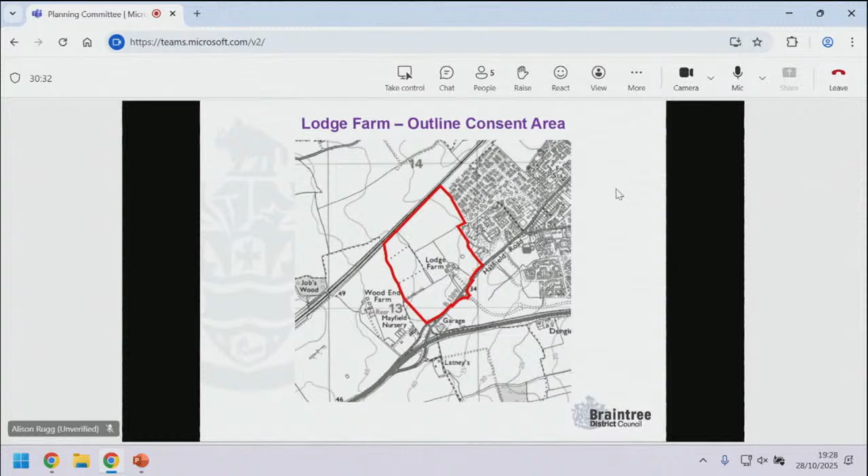To date, 524 dwellings have been consented by way of 5 separate reserved matters applications. 454 dwellings have been occupied, 305 of which are private and 149 affordable. This application for Phase 5, shown hatched on the screen, forms one of the final reserved matters phases for dwellings on the site.

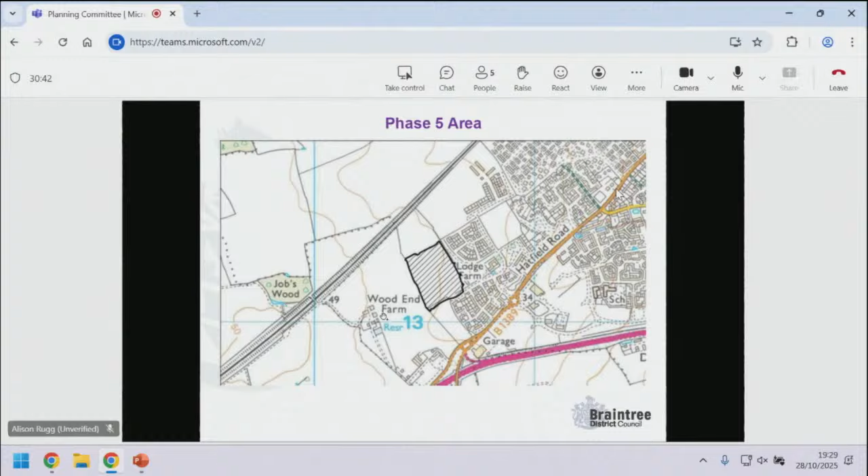Phase 5, outlined in yellow here, is approximately 4.76 hectares and is located along the western edge of Lodge Farm, with Phase 4 to the north and the enterprise land to the south and Phase 1B to the south. On the eastern edge of the site are mature trees and hedgerows, with the Central Park play area approved as part of Phase 2 beyond. The western edge of the site also features mature trees and hedgerows.

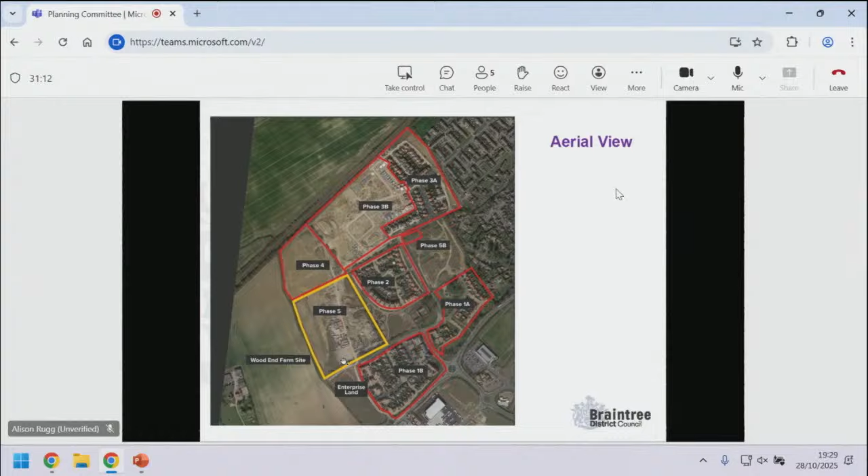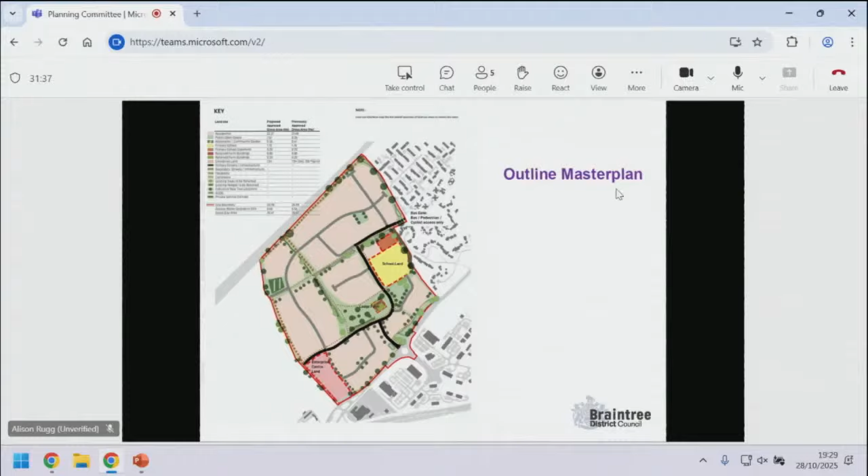The design guide ethos of the site is underpinned by the overall vision of the outline application master plan to provide an attractive gateway into the town with a mix of commercial, residential and open spaces along the northern side of Hatfield Road. The principle of development has been established by way of the outline planning permission, and therefore only layout, appearance, scale and landscaping are for consideration under this reserved matters application.

During the lifetime of the application, the proposal has been modified following significant engagement between officers and applicant to overcome concerns regarding layout and design.

In terms of layout, the site is broadly rectangular in shape, with a central tree-lined street running north to south, which links to the remainder of the Lodge Farm development and acts as the 2 main vehicular access points into the phase. To the eastern and western sides of the central tree-lined street are development parcels either side, and the approved outline parameter plan dictates the road structure through the site, along with footpaths which run down both sides and the height of buildings.

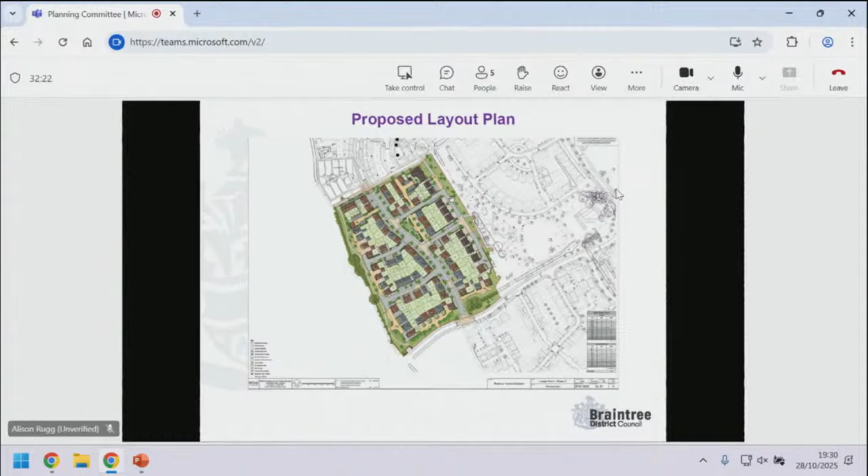In terms of scale, the application proposes residential dwellings as a series of 2, 2.5 and 3-storey detached, semi-detached and terraced dwellings, with the inclusion of a block of flats to the north-eastern corner, and 1-storey bungalows here. The taller 2.5 and 3-storey buildings are located along the eastern edge, fronting the adjacent park. The remainder of the site is mainly 2 storeys in height, shown in yellow, with a scattering of 2.5-storey marker dwellings, shown in red. The height of the proposed dwellings is in accordance with the approved building heights parameter plan approved at the outline stage.

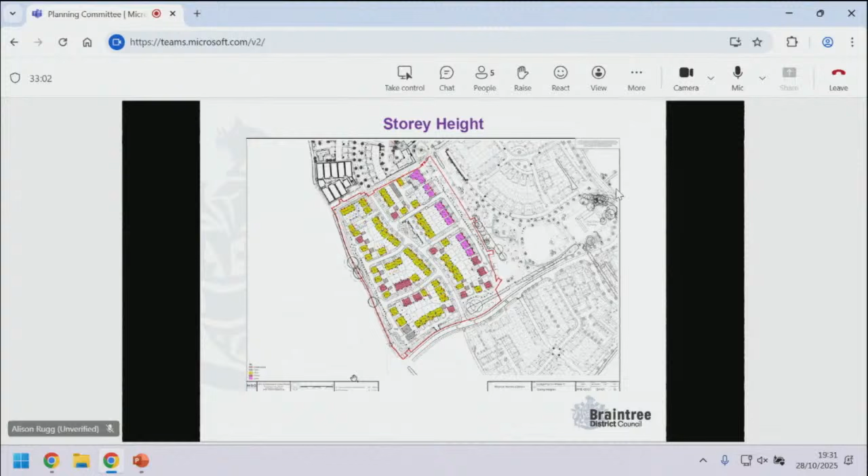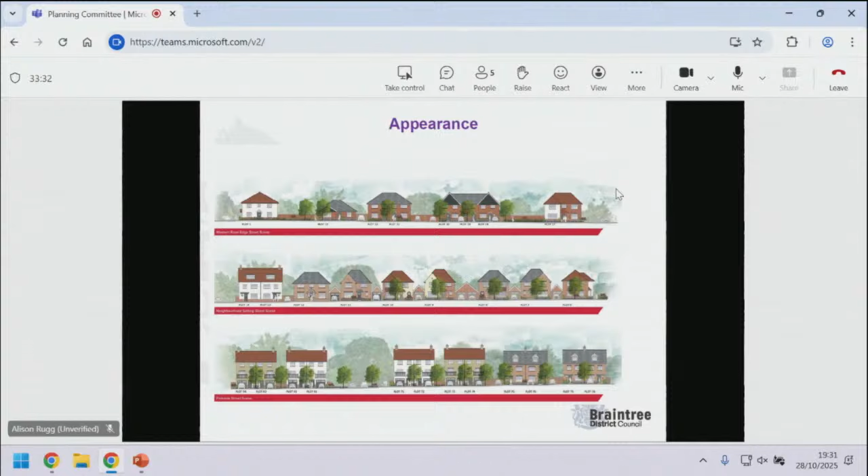The appearance of the dwellings is in general accordance with the approved site-wide design guide approved at the outline stage as well. The mix of materials would include red buff brick, light-coloured render, light and dark coloured weatherboarding, red, brown and slate grey colour roof tiles in line with the previously consented palette of materials. Chimneys also feature throughout the site on prominent buildings. The design of the dwellings does not seek to create stark variations, but subtle changes that make the development feel cohesive to the rest of the approved Lodge Farm sites.

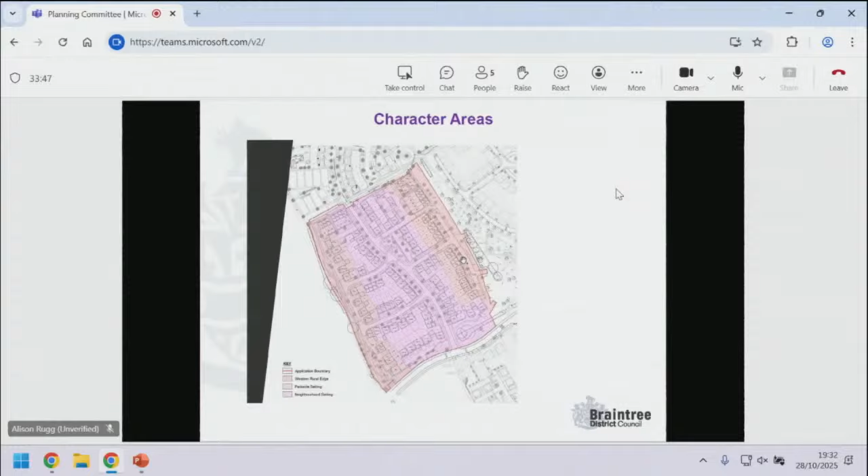3 character areas have been proposed for the site: the western rural edge to the west, the neighbourhood setting in the middle, and the parkside setting to the east. The western rural edge, which currently overlooks the open countryside onto the Wood End Farm land, consists of medium density housing, providing an appropriate transition to a soft development edge utilising existing field hedgerows and field boundaries. This area consists of 2-storey detached and semi-detached typologies, with limited instances of 2.5-storey buildings and 1-storey bungalows.

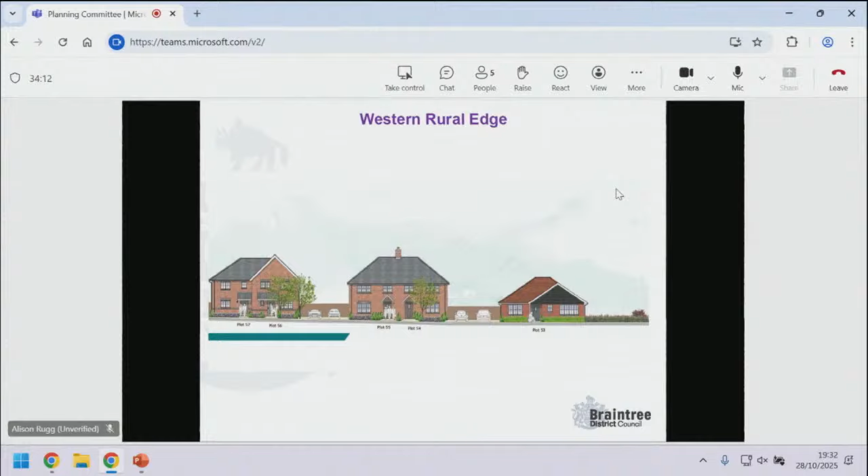The neighbourhood setting character area is located within the centre of the site and features the highest density. Building typologies consist of detached and semi-detached 2 and 2.5-storey dwellings, as well as terraced and mews housing typologies.

The built form in this area will have a strong urban frontage and a consistent building line close to the back edge of the footway. Visitor parking will be located in streets in defined parking courts, and traffic calming measures such as raised tables and crossroads features defined by street trees will act as keynotes throughout this character area.

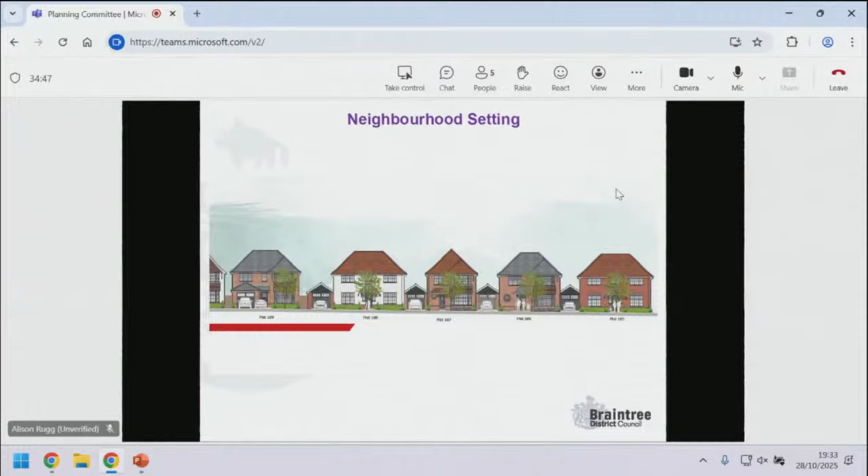The Parkside character area runs along the eastern edge overlooking Phase 2. The built form varies in terms of dwelling size and features 2.5 and 3-storey townhouse typologies. A 3-storey apartment block, which can be seen on the screen here, is located in the northwest corner of the site to match the design ethos of the adjacent Phase 4 apartment block.

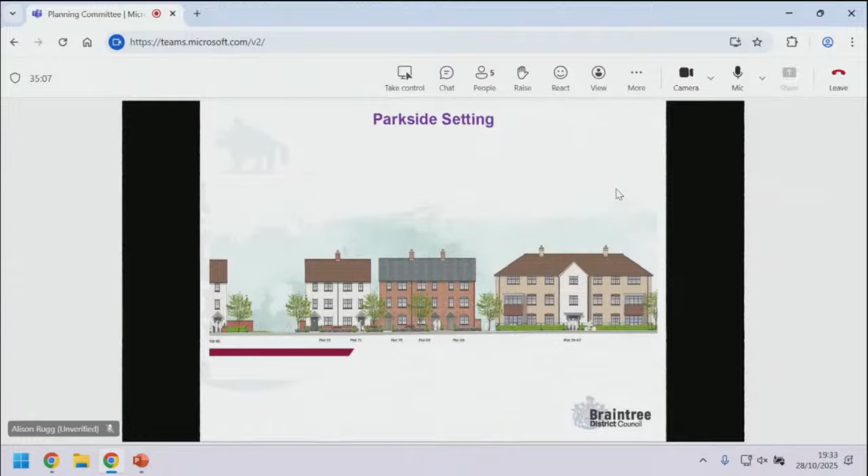In terms of residential quality, all the dwellings have an adequate level of internal and external space. All units are dual aspect and provide good levels of natural light and outlook. All the dwellings are in accordance with the Essex Design Guide and NDSS in terms of internal and external amenity space and separation distances.

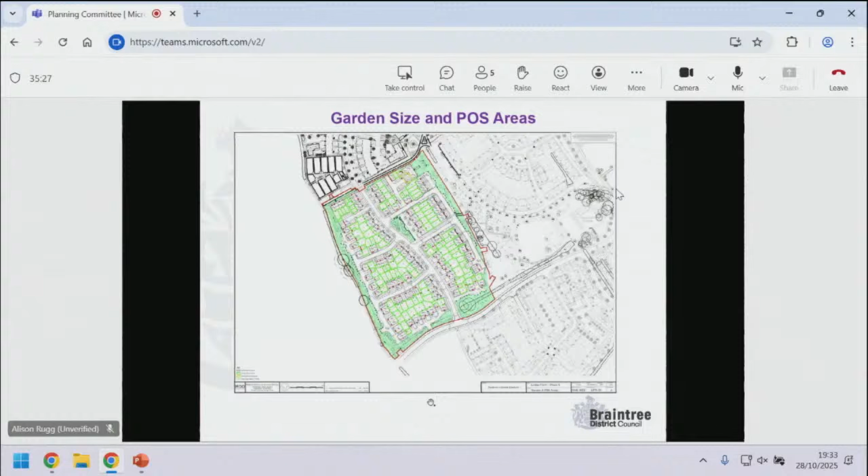In terms of affordable housing, the Section 106 agreement attached to the outline permission requires 30% provision. The application proposes a total of 33 affordable dwellings, 24 of which will be for affordable rent, shown red on the plan, and 9 shared ownership dwellings, shown grey on the plan. The proposal also includes 2 wheelchair accessible units, accessible housing bungalows which comply with Building Regulations Part M4 Category 3A. The Council's housing officer is supportive of the affordable mix and location.

In terms of market housing, the proposal does not accord with the Council's SHMA in that there is an obvious under-provision of 2-bed dwellings and over-provision of 4+ bed dwellings. The original outline was considered prior to the adoption of the new local plan, so there is no planning condition on the outline permission that requires the mix of market dwellings to match the mix specified in the SHMA. The SHMA does state that market housing mix can deviate from the expected percentage mix should the site be more suitable to an alternative mix.

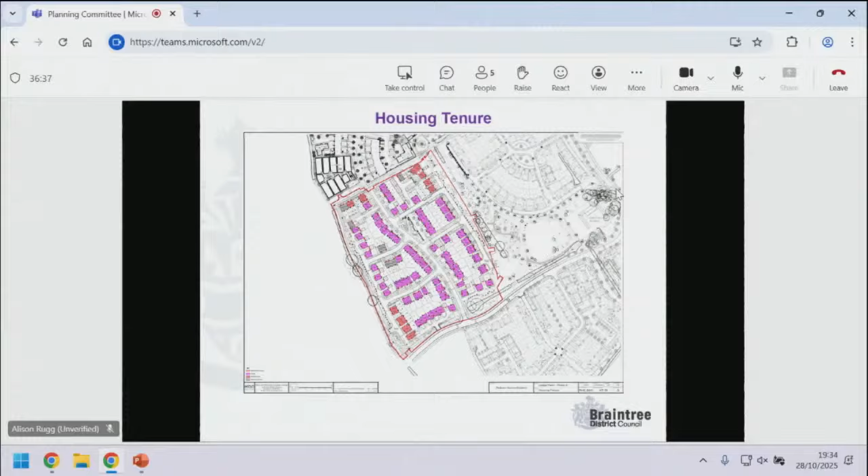The pattern of development and size of houses within the previous phases of Lodge Farm edges towards a mix of larger dwellings, all of which have been sold and are currently occupied. This is not considered in its own right to form a reason for refusal.

In terms of open space, the phase delivers a total of 0.92 hectares of open space and complies with the outline Section 106, which requires 7.31 hectares to be delivered throughout the site.

The open space is segregated into 3 character areas: the parkland edge to the east, the open space, and the informal edge to the park. The existing hedge and tree planting will be enhanced, and footpaths and shared cycleway will create direct links into the adjacent park with access points here.

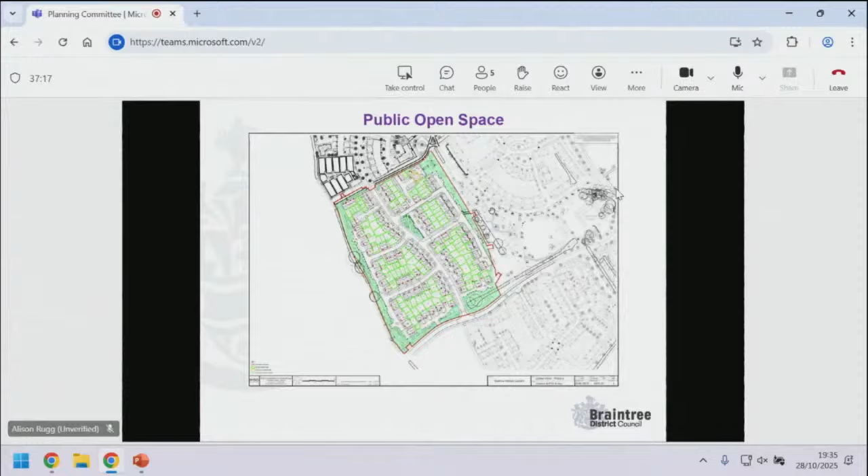The western edge open space creates a strong landscape buffer which helps to soften the visual impact of the development and views into the site from the west.

The open space features a perimeter leisure route with connections north and south. The path features a sculpture trail providing opportunities for play and seating.

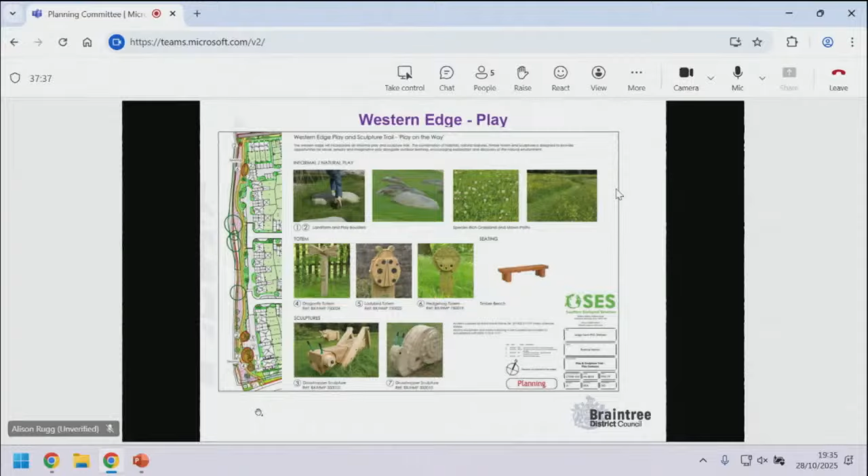The central green measures approximately 570 square metres and is located in the heart of Phase 5, designated as a formal landscape space enclosed by feature railings and a hornbeam hedge. The area would incorporate seating and natural features, providing opportunities for informal doorstep play.

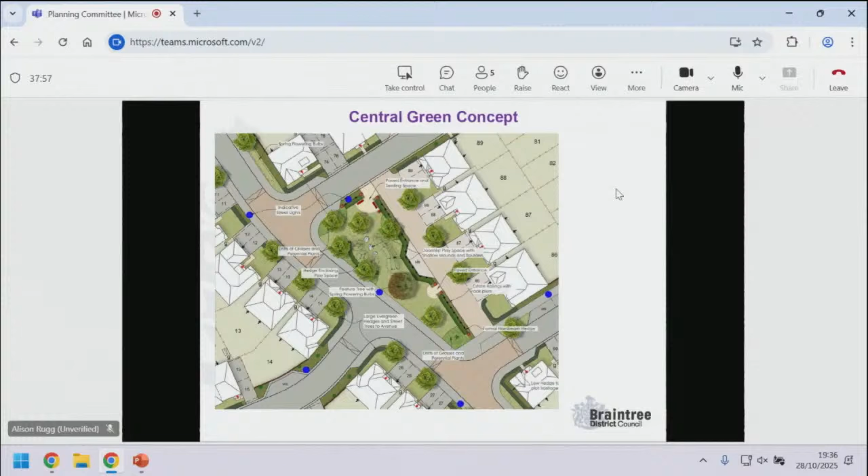In terms of new landscaping, new planting will build on the character of the existing vegetation to create a landscape-dominated setting to the development, reinforcing the parkland character and providing opportunities for biodiversity. A hierarchy of tree planting is proposed with native, evergreen, deciduous specimen trees.

New strategic tree planting is incorporated along the streets, throughout areas of public open space and along the green corridors, totalling 106 new trees. All of the street trees will be located within management company land.

Given the quantity of trees that have perished at Lodge Farm in recent years, the Council's Landscape Officer has recommended further details of tree planting come forward to ensure that every effort is made to prevent trees from dying.

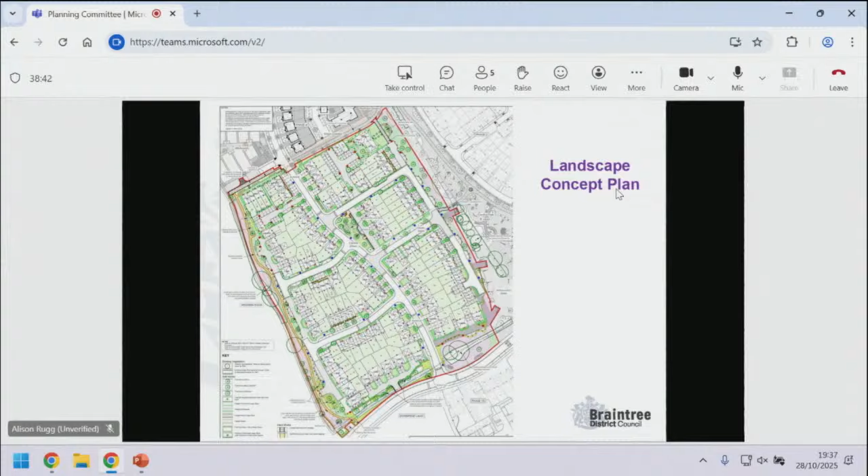The application proposes the removal of a Category U hedgerow, located to the south of the site here. This is to facilitate the creation of one dwelling, open space, the drainage infrastructure, footpath and access into the private drive. The hedgerow measures approximately 60 metres in length and consists of elder, smooth-leafed elm and common hawthorn.

The report that accompanied the application states that the structural condition is poor and features Dutch elm disease and dead trees. Whilst the removal of any existing vegetation is disappointing, the loss of this low-quality hedgerow is considered to be minor and can be mitigated with new native planting as part of the Landscape Master Plan, which in turn will increase biodiversity on the site, including the addition of 106 trees.

Whilst ecology was considered at the outline stage, an updated ecological appraisal accompanied the application, which was assessed by the Council's ecologist. No objections were raised, however lighting details will come forward by way of condition to ensure that all lighting is bat sensitive on the site.

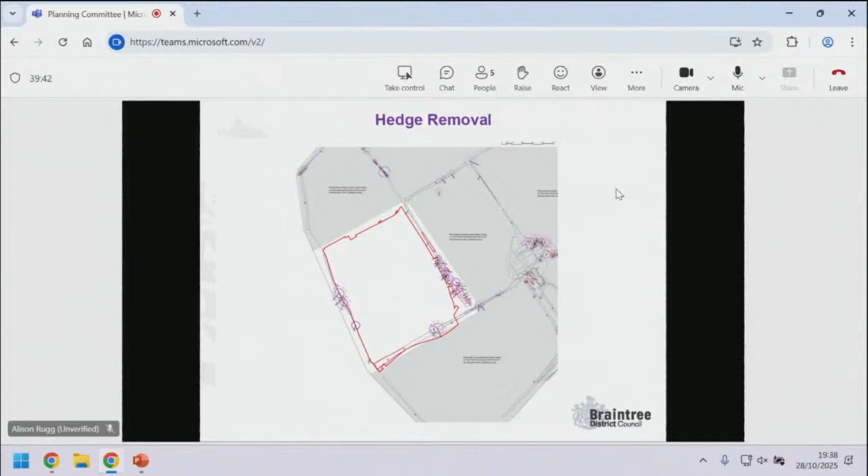Parking provision has been made in accordance with Essex parking standards. A total of 215 allocated parking spaces have been provided, shown in pink, and 29 visitor spaces, evenly distributed throughout the site. Bin storage areas are located within rear gardens, and bin collection points are located where necessary to ensure appropriate building control bin drag distances.

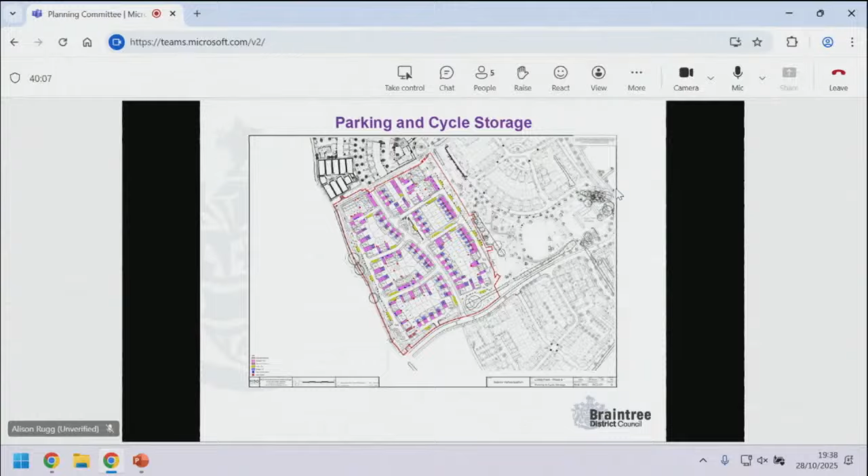In terms of highway adoption, a late concern was raised by Essex Highways in that they would not adopt the loop road to the north of the site. This was necessary as refuse collection vehicles are required to drive on the road for waste collection. This resulted in further discussion with Waste Services and Highways, and a solution was found in that BDC Waste Services will now drive on the unadopted road, subject to a legal agreement being entered into.

From this, a suite of updated plans was submitted and the principle of a legal agreement agreed between the Council and the applicant to ensure no liability on BDC should there be any damage to private roads from refuse vehicles using them.

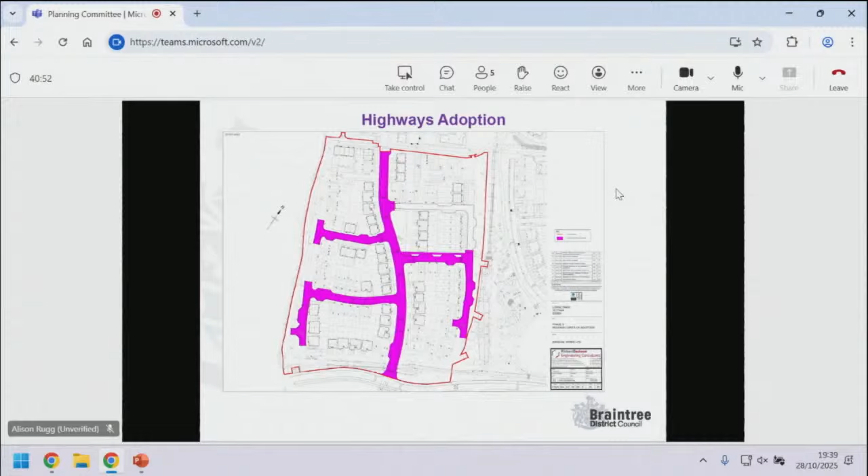A separate written update report accompanies the application and has been circulated to members today. These updates relate to highways considerations and waste collection, following the responses received from Highways and BDC Waste Services. It also relates to a correction to the housing mix and market housing mix, arboricultural impact assessment and method statement, an amendment to the list of approved plans due to the last-minute Highways considerations, and also the subsequent amendment to recommendation to include the requirement for a legal agreement.

In conclusion, the principle of residential development of the site is established under the existing outline permission. Highways considerations have been resolved. The application submission is a well-designed and carefully considered proposal, and officers consider that the proposed appearance, landscaping, layout and scale of the development is acceptable in planning terms, subject to the recommended conditions. It's therefore recommended that members resolve to grant planning permission subject to the Section 106 heads of terms and recommended conditions. Thank you.

Thank you, Ali, for taking us through that fairly detailed application. Members, who would like to kick off comments?

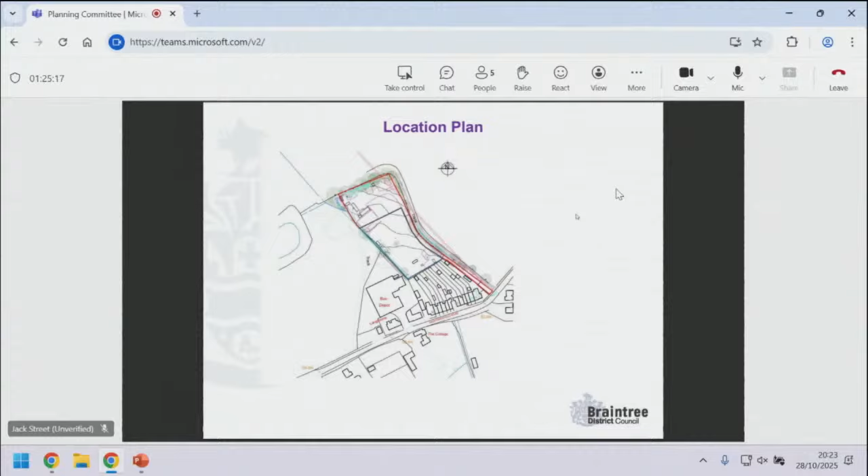The location plan shows the site as described, north of Wethersfield Road. The site is edged red. It encompasses the track which runs across the eastern and northeastern perimeter of the site and opens up where the pitches would be sited at the end. It's in this area where the hard standing referenced in the description of development is.

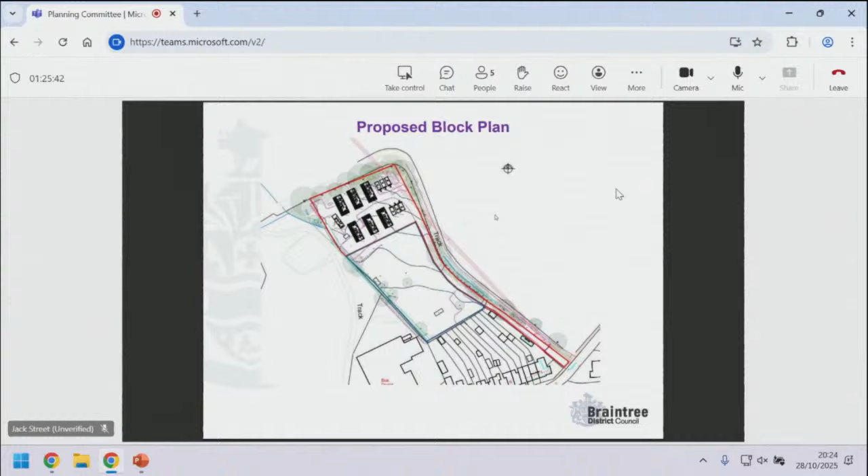The 6 pitches are laid out on the site layout plan as shown. We'll zoom into this image shortly, but you can see the amenity area on the left and the 6 touring caravan pitches on the right. To the south-southwest of the site, you can see the bus depot. To the south, you can see the properties that face onto Wethersfield Road.

The zoomed-in block plan of the site area shows the arrangement of static caravans, the existing day room referenced as an amenity room in the description, and the touring caravans on the right.

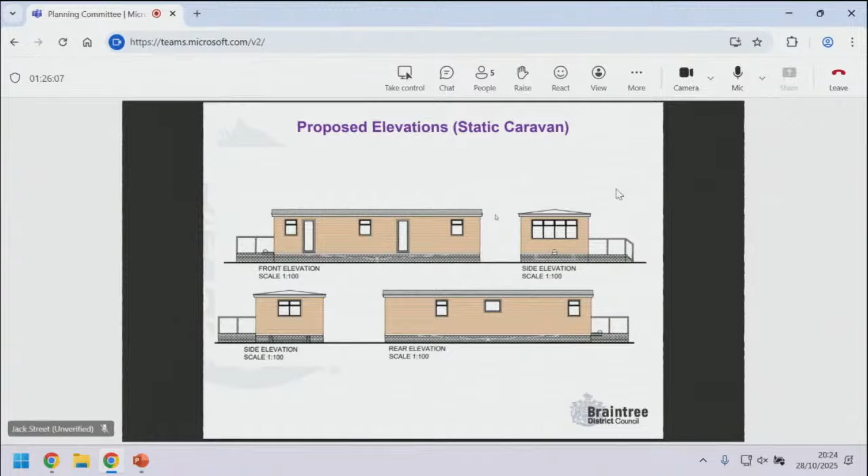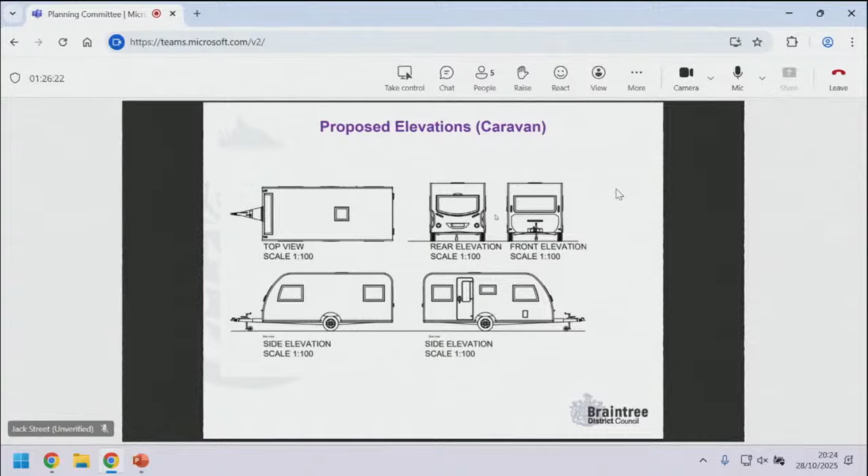Members update: since the publishing of the report, Essex County Fire and Rescue Service did come back to our request for consultation, and they posed a number of operational requirements for them to consider. Most of these are considered at a building regulations observation stage, but officers note that although the access road does pinch in some points, it does look as though by condition those could be met.

Informatives were relating to building regulations, water supplies and sprinkler systems, which are fairly common in the advice.

A revised plan was submitted last week, and the LPA did acknowledge the submission of the plan to address concerns surrounding overlooking, which was referenced by one of the speakers tonight. I'll show you that shortly.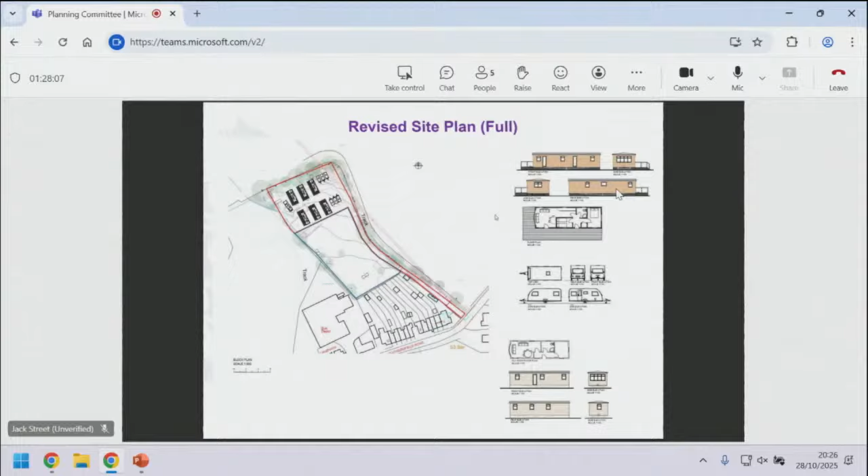So the full site plan, essentially as shown in the committee report, talks about two pitches potentially overlapping onto some dilapidated barns. So if we look at the revised block plan and look at the site area, you can see, I'm not sure how clear it is here, but there is a cyan outline here and here of the locations of the barns.

You'll see them in the site photos how they appear. So what the site plan does show is that the buildings have shifted to the south to avoid those buildings. It doesn't address the concerns in paragraph 11.3.12, which talks about the bedrooms of these rooms at the back looking directly onto those buildings and the poor amenity that may result. But nonetheless, that's what it shows.

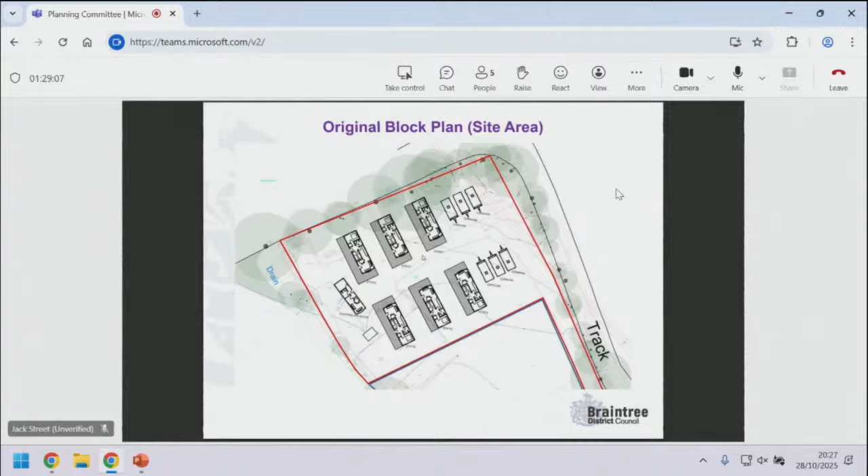Now, a comparison with the original block plan, you can see that kind of shift. That's the revised, that's the original. So you can see the shift down. Whilst this is not an exact science, having measured the two plans, it is evident that the red line does also shift as those developments shift.

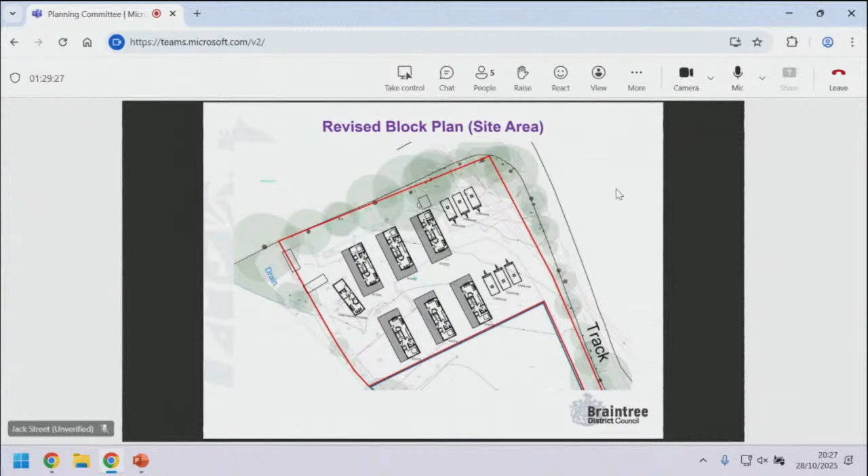Now, we haven't interrogated that much further because we haven't accepted the plan, but the other thing to note is between the revised plan and the original plan, there are a number of unaccounted for structures here and here, which, again, we would interrogate if we had accepted the plan, but for reference purposes, those were the revised plans.

So, summarising first, and we'll go on to the photos, the officer's view is that in principle this is an acceptable location for this type of development. It's not an isolated site and it could be accepted in principle. The council is not meeting its supply, and we do need to find these sites. However, we do need to make sure that it meets all other policy requirements as well.

For the following reasons, the application can't be supported, and those are highway safety, particularly restricted visibility at the access, which Essex Highways, ECC Highways, have objected to due to lack of visibility splays and speed data. Harm cannot be ruled out on that point, and whilst the access is currently in use, it may be retrospective. We don't have that evidence in front of us. We don't have that surety going forward that will always be the case.

This is an intensification of this access, and whilst there are no reported accidents, officers are aware that there have been accidents in the past, so it's not uncommon, it's not as though it hasn't happened in the past. That data also, although it isn't before me to consider, doesn't consider things like near misses and the types of safety concerns that residents have raised to us. So we would need that data to be able to make a more informed decision.

In terms of ecology, as we've described, there is a potential loss of dilapidated barns. Now, whether or not that is the intention isn't what the plan shows. Whether that could be revised, going forward through a new submission, that would be something we would need to consider. However, considering the plans that we've got, our view as officers is that ecology harm can't be ruled out at this stage, and that could be addressed through a further submission.

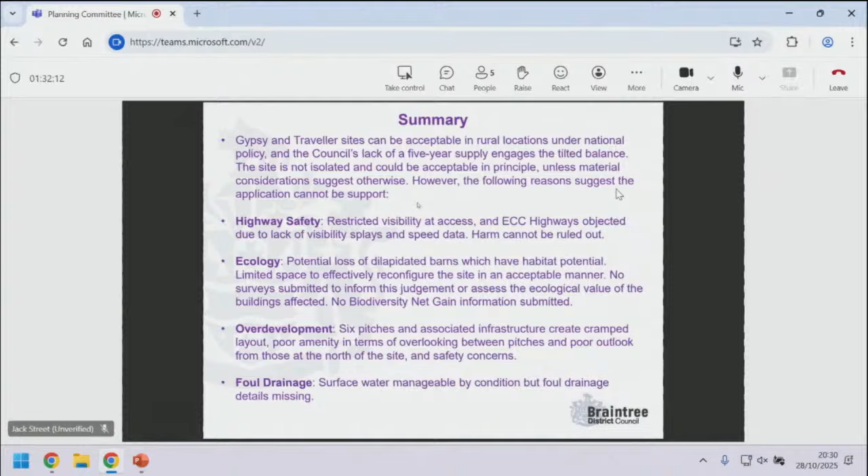Foul drainage has been referenced by many speakers tonight. It is a known issue. The lead local flood authority did provide some advice on surface water which could be taken up by condition, but foul drainage details were missing, and given the flood concerns locally, this is a consideration we as officers wouldn't look to leave to condition. We would require that prior to determination to ensure those measures are in place before we were to take forward an approval.

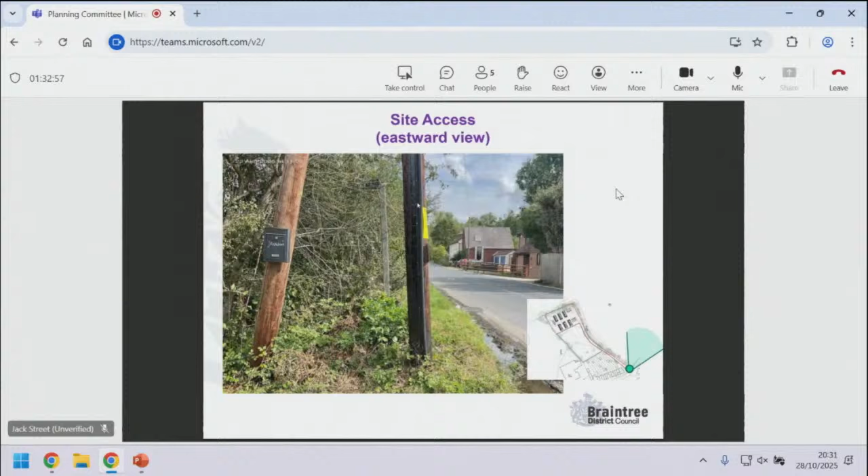In terms of the site access, if you take the map in the bottom right for reference, this is looking from the site. There's a set of gates behind, so this is taken from there, and this is further back into the site, close to where the fence line terminates. That's the access on the approach up to Wethersfield Road. This is looking eastwards, roughly 2 metres back from the carriageway. As you pull more towards the highway and further still, the access around that roadside vegetation clears out, although that stay pole does restrict some visibility. At a slow manoeuvre looking eastwards, the visibility is better compared to the west, which we'll look at now.

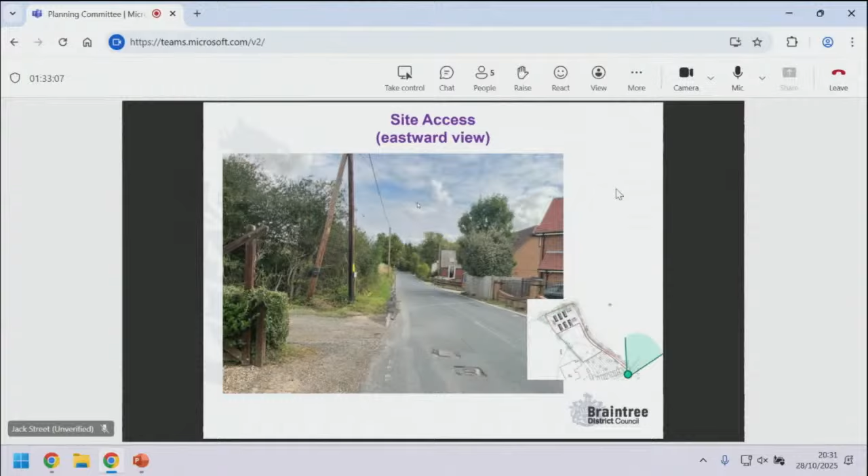This is a photo looking from the access due west. The officer's report talks about the hedge owned by 1 Wethersfield Road, which has recently been cut to allow this visibility through. The owner of that site could allow the hedge to re-establish, at which point visibility would be further restricted, and we've been provided no mechanism to protect that hedge, particularly as it falls within third-party ownership. The bend in the road is best seen by the parked cars in the background, where you can see the on-street parking, the bend in the road, and the visibility severely reduced in this western direction. Because of these considerations, we wouldn't look to leave that to condition, as we have no assurance it could be brought forward to the satisfaction of the highway authorities.

This would be a matter that would need to be considered prior to determination.

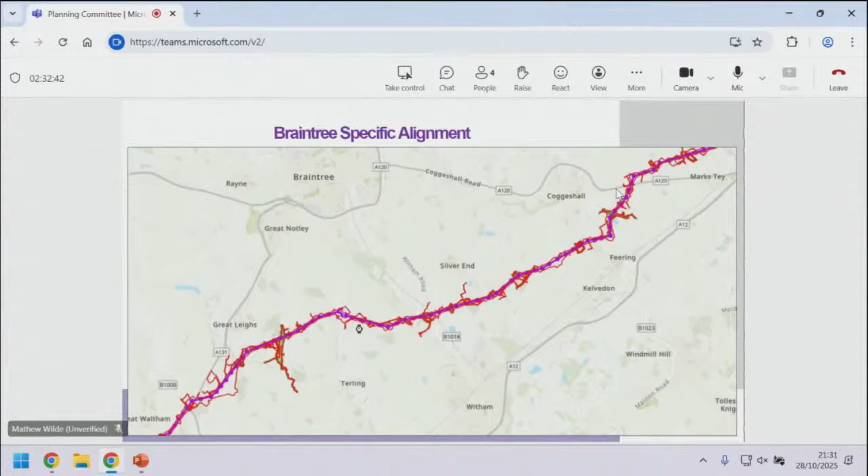Then you've got the listed buildings, which are the green triangles. There's a couple of red and yellow ones as well, which are also listed buildings of a higher status. You've got the public rights of way marked out, the purple dotted lines, and the yellow hatched areas are the conservation areas.

Importantly, the red line is essentially what they call the order limits. With limits of deviation, in theory, those pylons and that route could go anywhere within that red line. So while they will look at the impacts as a whole, they've put pen to paper and said this is where we think it could go, but that alignment may well change within those order limits, within that red line.

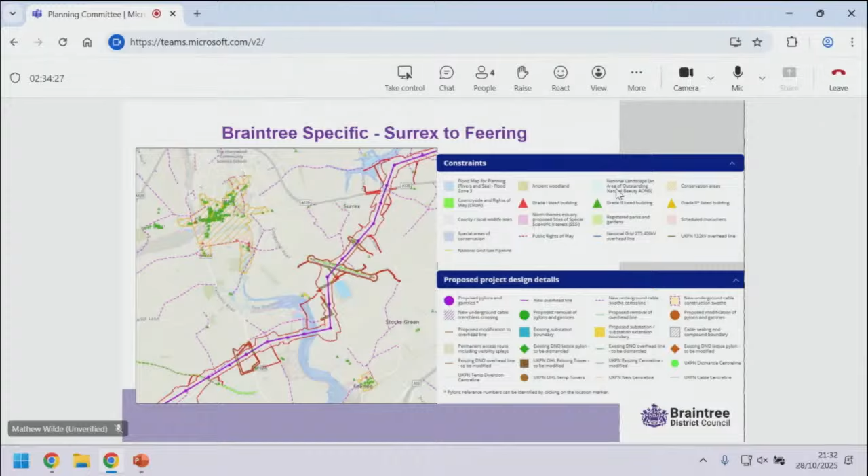Okay, so the submission helpfully includes some visualisations. At the top of this screen you'll see the existing baseline image, and at the bottom you'll see where they've superimposed some pylons showing the approximate route of the proposals at the moment. If you look at the map on the right hand side, it shows 2 different views. This particular image is view 315, about 1 kilometre to the nearest structure in terms of distance.

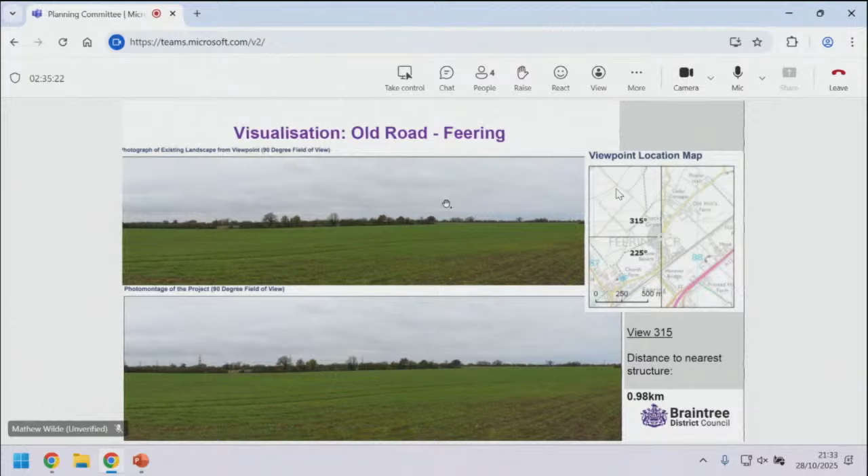Applying that, I've taken on quite a few visualisations which I think give you a flavour of the impact this is going to have on our district.

Again, you've got the existing image at the top and the superimposed image at the bottom. Notably, this image is from below Coggeshall Hamlet, view 145, so it's looking quite close, only 0.43 kilometres to the nearest structure.

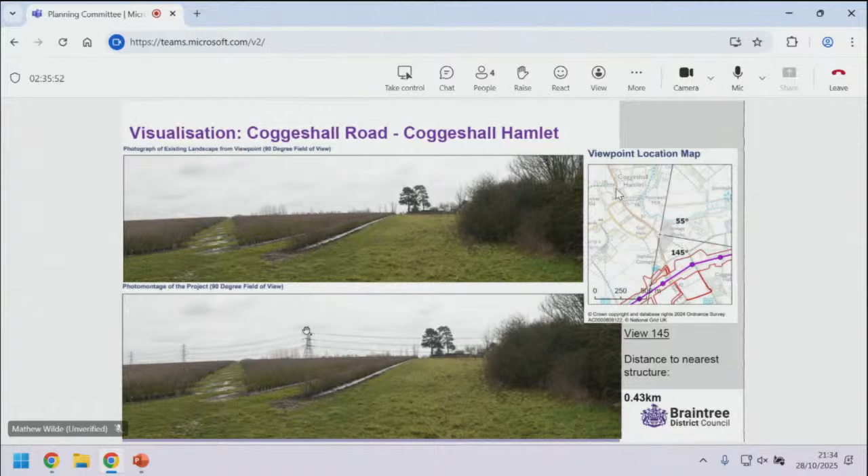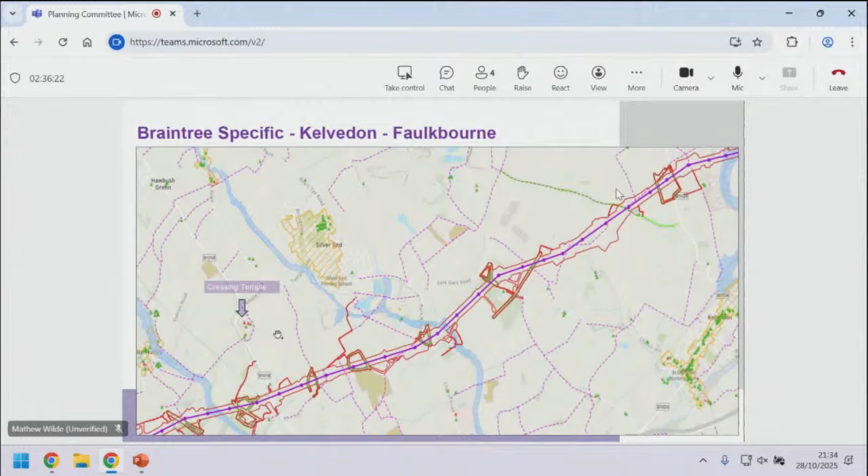I've included one image, actually my own site photographs from just outside Rivenhall Place and from Church Road. This wasn't captured in the visualisations, so they didn't have any superimposed images unfortunately, so I've included my own images from my own site visit for members' reference. You can see the different colours: blue is looking east, and red is looking westerly. I've also included a picture of the tree known as Henry in the top right.

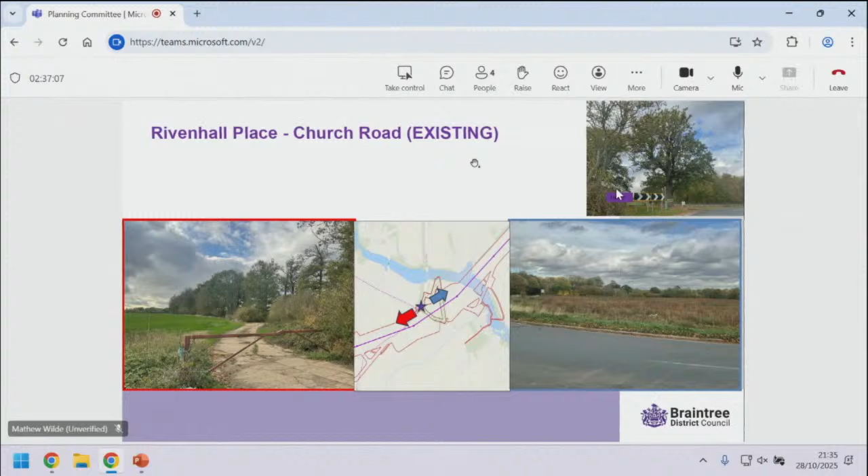A couple more visualisations in this area. This is public right of way 108_15 to the south of Silver End. You can see again the pylons are quite close in this location, about 0.4 kilometres away.

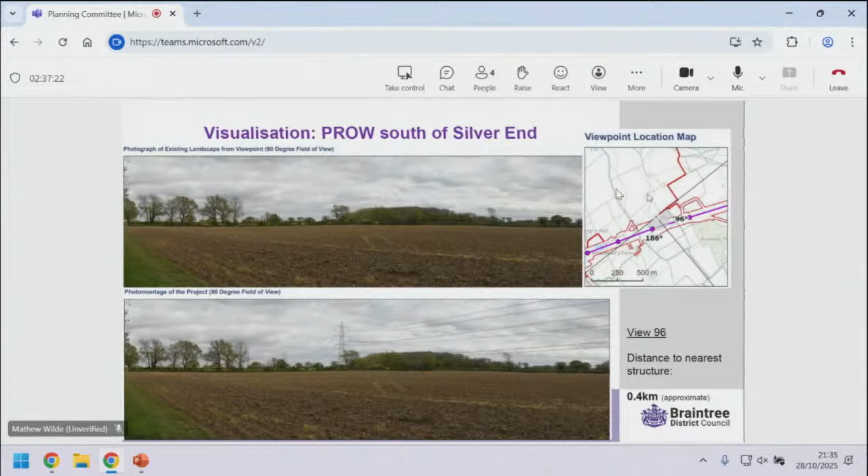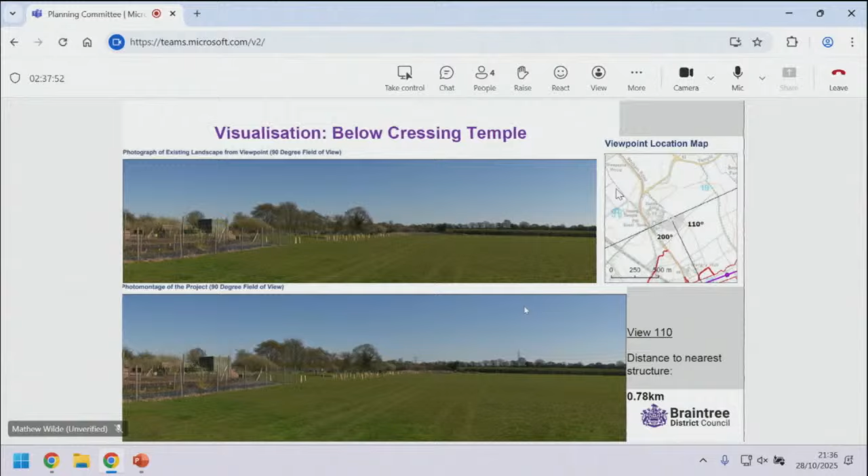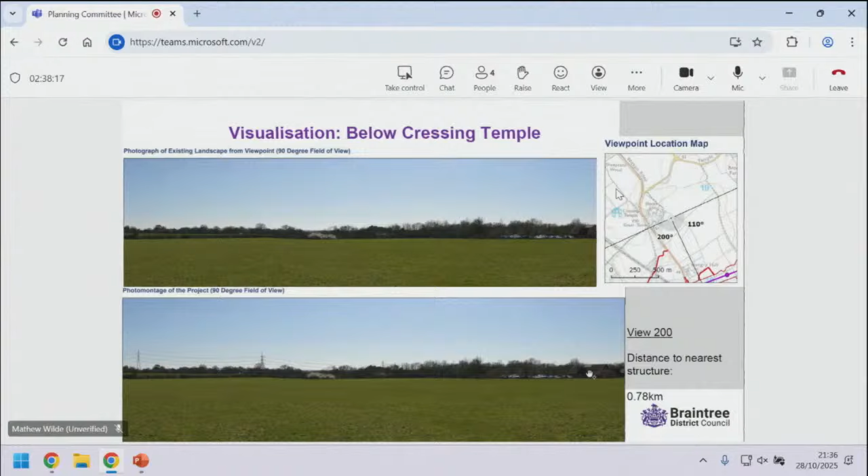I've included both visualisations on this image, relating to Cressing Temple. This is just below Cressing Temple, a little to the side and below. The first one is view 110, showing the pylons from a distance of about 0.78 kilometres away, or what they might look like. The other view, view 200, looks southwesterly, about 90 degrees. You can see how the pylons go across where there's obviously none at the moment, and you can also see the visitor centre for Cressing Temple.

Finally, Great Leighs - the stretch north of Thorpe Fairstead and Fuller Street, where our district ends. This hatch green line is where they're proposing to underground one of the lower voltage lines to make way for the high voltage 400 kilovolt line. The undergrounding in our district is limited to 0.2 kilometres, put forward for functional reasons because the line has to go underground an existing 400 kilovolt line, the Rayleigh to Pelham line. So this one is being undergrounded rather than the other way around.

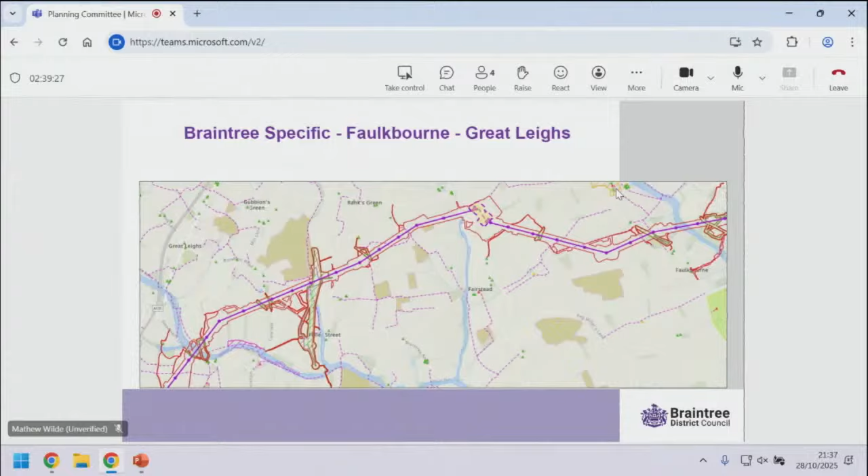To do that, it will need two cable sealing end compounds - bit of a mouthful, but I'll show you what they look like shortly. A couple more visualisations.

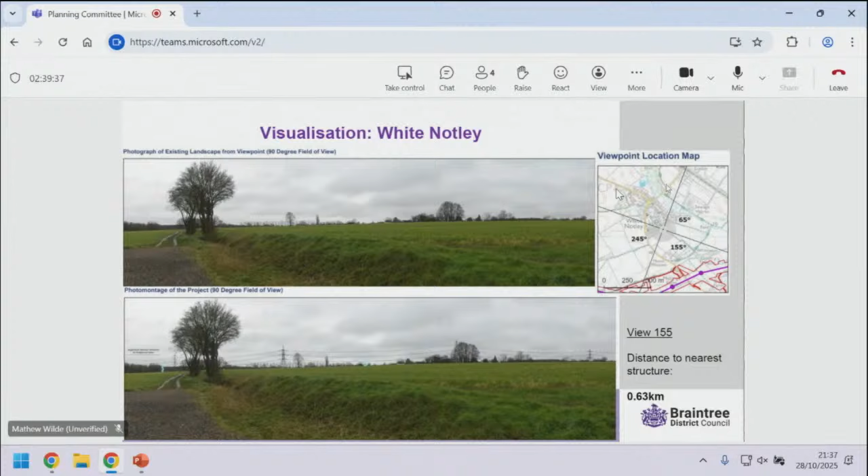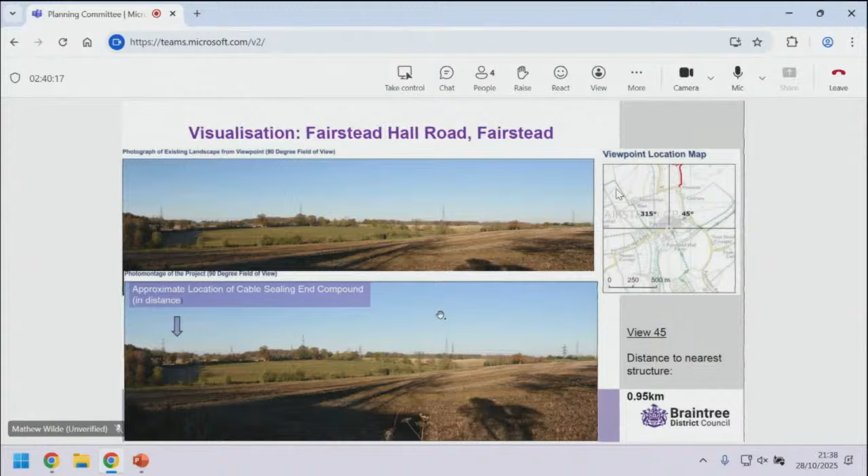One from White Notley - this is V155, 0.63 kilometres from the nearest structure. And this one is from Fairstead Hall Road, V45, looking back across. The approximate location of the cable sealing compound is down here. You can see the existing 400 kilovolt line, and in the bottom image the superimposed line. In this view, if the Norwich to Tilbury proposals were approved, you'd see two pylons side by side across the route, not just two pylons - and then it's the same situation with this one.

East of Ranks Green, near Blix's Farm - that view. I've looked at view 105, which looks back at the proposal to the east southeast, and again there'd be the two lines.

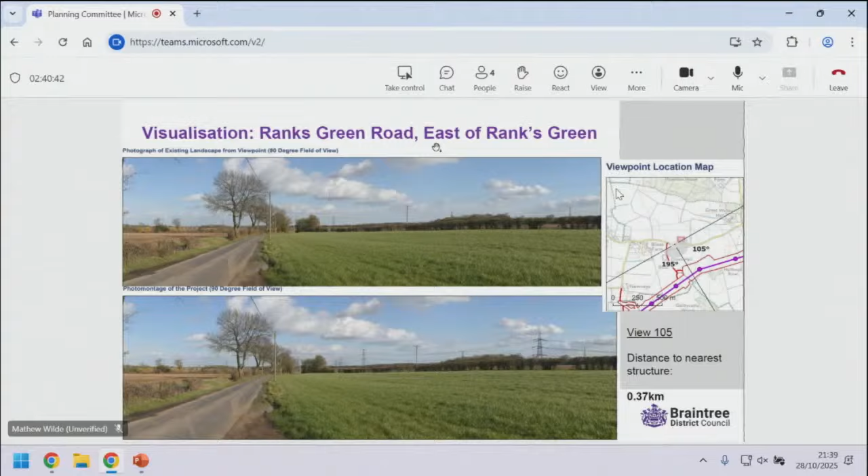Cable sealing end compounds are basically where the overhead line goes to a gantry, then into these modular conductors, and essentially that's where they go underground to the other cable sealing end compound where they come back above ground. The image on the left is a top-down view of how that works, but it doesn't show much that's easy to understand, so I've included an example image on the top right to give you an idea. The section below is what they've submitted with the DCO - the gantry is about 13 metres high, and the rest is about 8 metres.

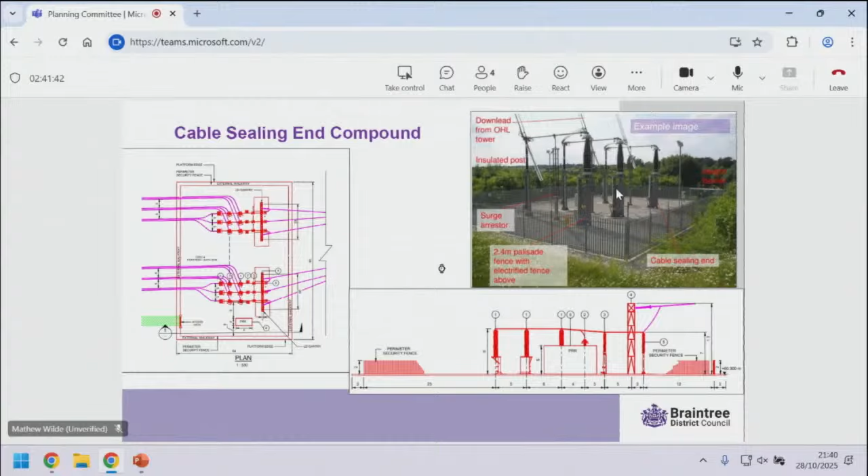From my own site visit, the actual location is within one field. I've taken two images, one looking back across - one cable sealing compound would be around this location, and the other would be just forward of the tree line here. The field is actually quite self-contained from Fairstead Road and elevated, so there wouldn't be much view across, but there is a public right of way alongside here, so that will be highly visible, subject to some screening to be put in. There's no real public right of way on the other side, so you wouldn't see that one as much. Note there's someone doing archaeological trial trenching at the time I went down there.

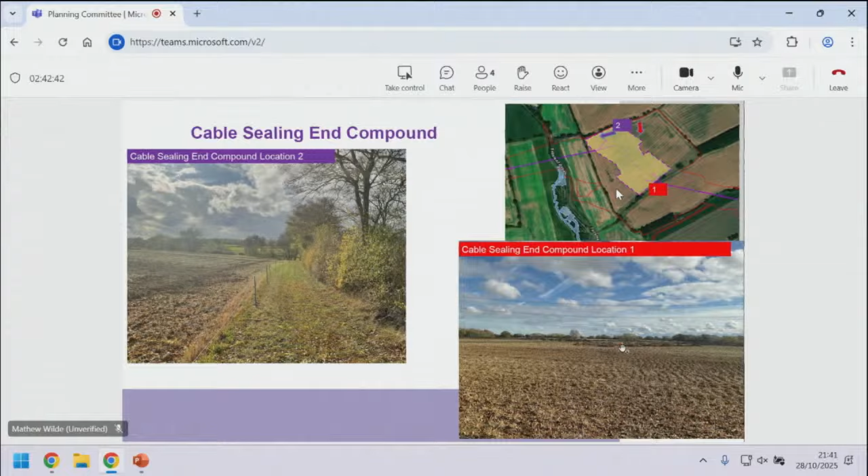So the purpose of bringing to committee is just for members to make observations or highlight any concerns that they want Councillor Spray to be aware of.

So the key things are the impacts, and I've talked about those environmental impact assessment topics like landscape and visual, contaminated land, soils, historic environment, so all things that have been scoped in, mitigation and compensation, like new planting, mitigation planting, biodiversity net gain, but also one of the things that's not in the report, which I've subsequently learned, is that they're seeking to, as part of mitigation, provide a replacement for every loss of one tree to plant 3 trees.

And they estimate that there would be about 10,000 trees lost as part of this proposal. So that would, in theory, mean there would be 30,000 trees replanted, although at the moment there's nothing on how that would actually happen and where. So I think for officers, we'd want to see that any loss in our district be replaced in our district. But those discussions still have to take place.

The need for the actual project itself, the underlying policies as well, which are really important, different to what we normally consider as part of the local plan, and obviously the alternatives to what's been proposed. So yes, that's it from me. I'll happily try and answer any questions. Can't make any promises. Thank you.

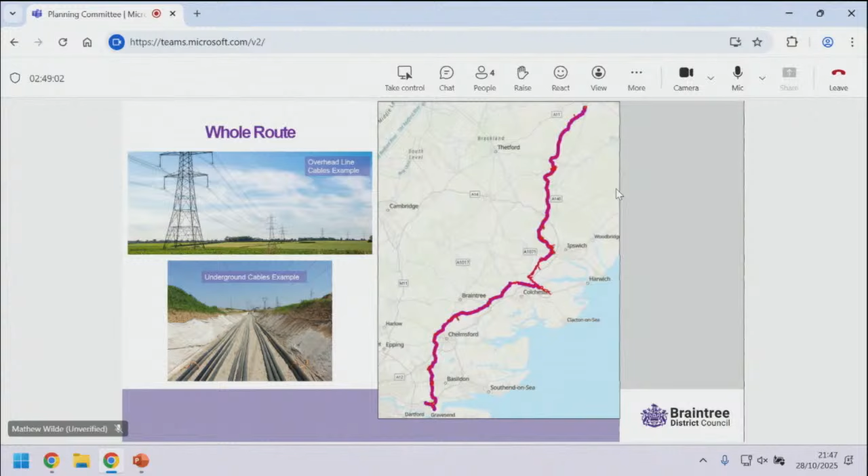One of the things I would say is there are plenty of places in the district where existing 400 kilovolt systems are far more in people's faces than the visualizations quite rightly suggest inside this. So I in no way question any of that.

But where it really gets interesting is in things like the cable sealing end compounds, where you take the new system underneath an existing 400 kilovolt system. Now we've got examples of that in the district. If anybody's as anal as me, I can show you. But what we know about this is a much bigger deal. So the photograph, top right of the illustration, I'm looking at Matt's slide of the sealing end compound.

This is all going into one field, 0.2 of a kilometre apart. There will be two pylons, 0.2 of a kilometre apart. Normally there are 3 pylons to a kilometre. Please challenge me if I'm wrong in any of this, because I'm not perfect.

So the picture at the top right, a 13-metre high gantry is pretty easily seen in the countryside. If you don't believe me, drive down the A131, because National Grid have just installed one at Twinstead. And the photograph does not include one of those gantries at all. So the visual impact is greater than the photograph suggests.

And to add to that, you've also got, in close proximity to that, 2 50-metre tall pylons, one for each sealing end compound. So the cumulative visual impact of that, which we haven't got an image for, is actually pretty high, and the level of work that's going to go into delivering it is also going to be great. We're going to see plenty of sign of this, because in my ward we've got a couple of kilometres of this going in. So it's quite important that when we discuss this, we truly understand what we're looking at.

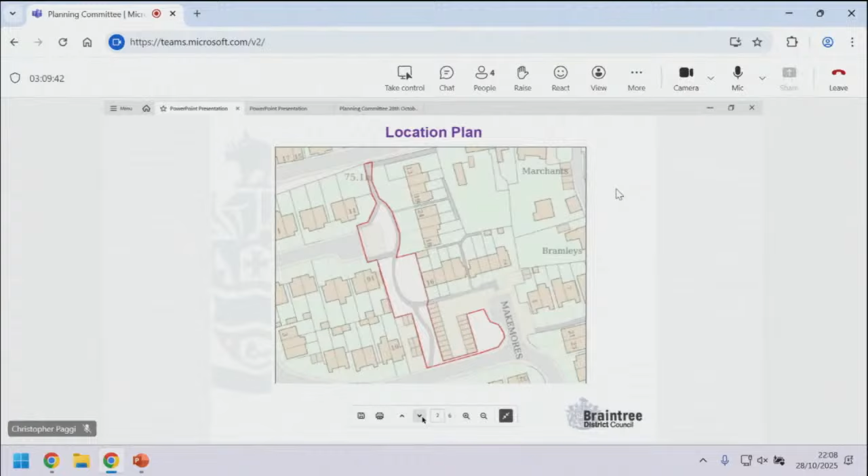0509. I'll just take you through the plans to start with. Bear with me. So the location - we are located off of Hance Lane in Rain, so we've got a series of connected areas of open space. We've got the red line plan here, and then the clustering of the trees. So essentially in 2 clusters, we have some of the proposed works to these trees up in this corner, but also within the central area. One of the observations made within the report is actually that the trees are visually prominent. They offer a high value of amenity.

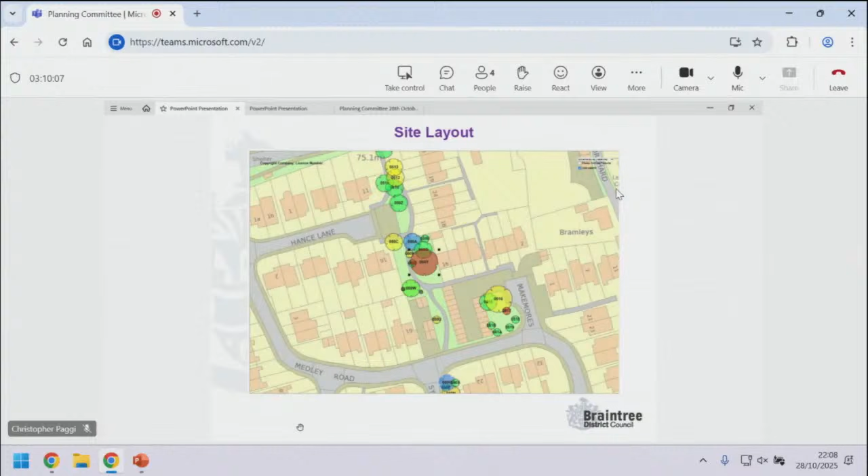In terms of the issues, the apple tree, which is 0509 and proposed for removal, is relatively small, in very poor condition, and largely dead. So the removal of it is considered in line with good arboricultural practices. All the other trees are in good condition. As I said, given the location, they offer high amenity value and are visually prominent. But they are located close to residential properties, and as they're on council-owned land, we have a duty of care and want to reduce and limit any potential harms of falling deadwood or other risks to those properties or footpaths. So the proposed work is considered in line with good management from an arboricultural sense, and would assist with our duty of care as the landowner.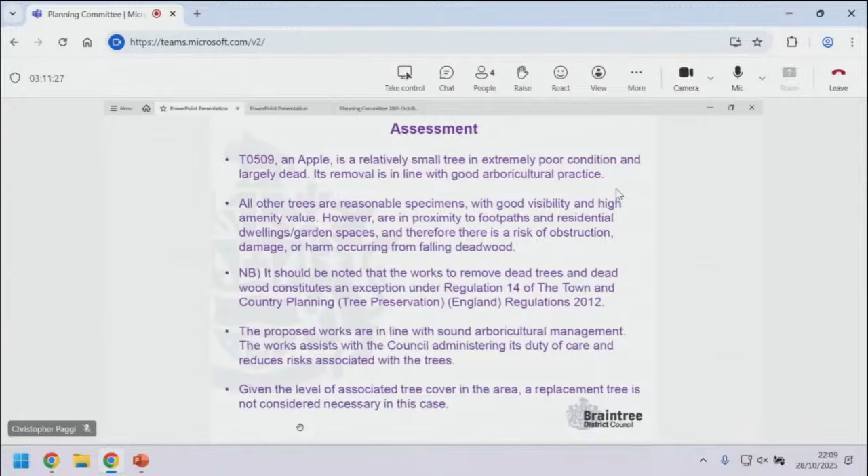Given the amount of trees within that space, it's not considered that the loss of the apple tree by itself would necessitate a need for a replacement tree in this particular case, so it's not recommended as a condition. If it was a standalone tree, quite often we would require a replacement tree, but given the coverage in that particular area, we were comfortable that its removal would be okay from an amenity perspective. In terms of representations, there are no objections from Rayne Parish Council, and we haven't had any representations from other residents. On that basis, it's recommended that consent is granted for the proposed works to the trees. Happy to take any questions.

Thank you, Chris. Councillor Hooks. Obviously, knowing the area well, I totally agree with the officer's recommendations, so happy to move.

Anybody else want to make any comments? Okay, that has been moved and seconded. All those in favour of officer's recommendation.

Thank you, members. Now we'll move on to the last item this evening, item 7B on your agenda, application number 25/01455. Now the TPO, this is land adjacent to Alderford Mill in Sible Hedingham. Chris is going to give us a presentation again.

Thank you, Madam Chairman. So another TPO application again, same reason being brought to Planning Committee. So we're over in Sible Hedingham on land adjacent to Alderford Water Mill, roughly in the centre of the village, and forms part of the River Walk, and adjacent to the listed building. So as with the others, it's quite a prominent location.

It's an ash tree in this particular case, and it's proposed to crown reduce it by 30% and reducing the laterals by 4 metres and removing dead wood. So again, very much in line with normal good management practices for the tree.

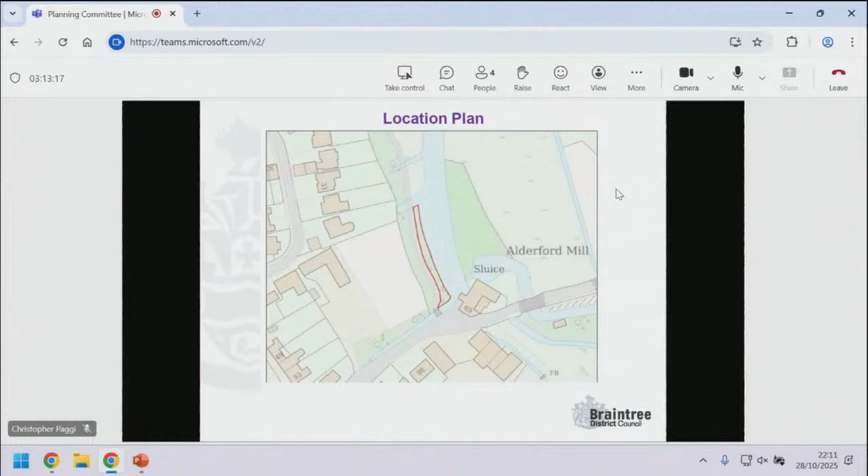We have the site location plan there in red just to give you the context. So you can just see the closest building, which is Alderford Mill, to the right hand side. And then the actual image of the tree, you can see it's a fairly large specimen in close proximity. Picture of it as well, so again you can see the spread of the canopy, and that's one of the reasons why the reduction is proposed to reduce that encroachment towards the mill.

So again, large mature specimen, high prominent within the landscape in the area, offers a high amenity value. The building adjacent is Grade 2 listed. There is signs of dead wood, but also symptoms of moderate infection with ash dieback, which is something we always need to be conscious of with ash trees.

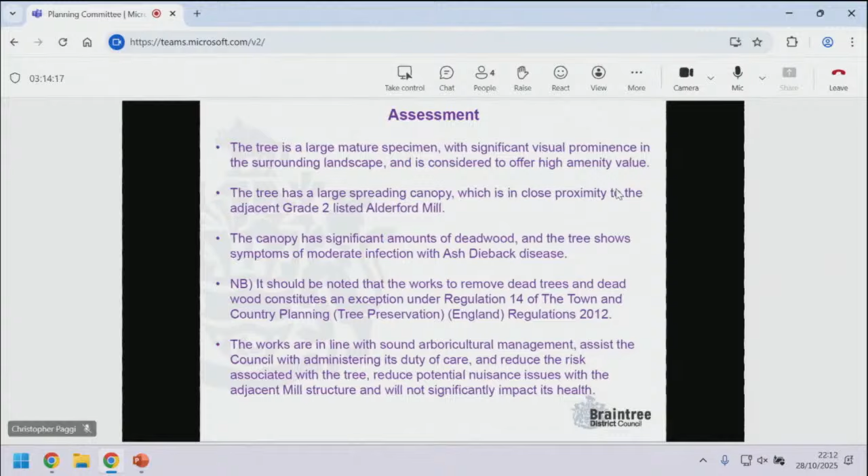But again, like with the previous application, the proposals here are considered to be in line with sound arboricultural management and to assist with our duty of care to manage the risk and reduce any potential nuisance from the tree. The proposed works are not considered to harm the integrity of the tree, and are therefore recommended for approval. Again, as with the last one, Sible Hedingham Parish Council raised no objections, and we didn't receive any other representations at all from residents either. So on that basis, the proposed works are recommended to be granted.

Thank you, Madam Chairman. Thank you, Chris. Councillor Beavers: Thank you, Chairman. Nothing to add, and I'm happy to move officers' recommendations if colleagues are happy.

Councillor Ritchie, seconding: Yeah, I'll just make a small comment, Chris, that I'm told that larger mature ash trees are much less likely to be affected by dieback than the younger ones.

Councillor Robert: Thank you, Madam Chairman. I'm not going to object to the proposal, but I was rather slightly intrigued at the photograph, comparing it with the description. That crown looked pretty healthy compared to a lot of ash trees. So I'm a little bit at a loss about the text which said it's suffering from disease. It may well be, but a lot of ash trees look a hell of a lot worse than that. And also it said significant dieback in the crown. Well, I know it's only a photograph, we had a quick glimpse at it, but it's not that bad.

So it's a lovely tree, and yeah, it probably does need the work to it, but I just thought the description didn't really match what we were seeing on screen. But the point about disease is a serious one. It does look to be that the bigger, longer established ashes do seem to have a bit more resistance. But the middle-sized ones, 20, 30 foot, they're going so fast now, and we are going to lose probably the majority of ash trees in this country, which is a terrible shame.